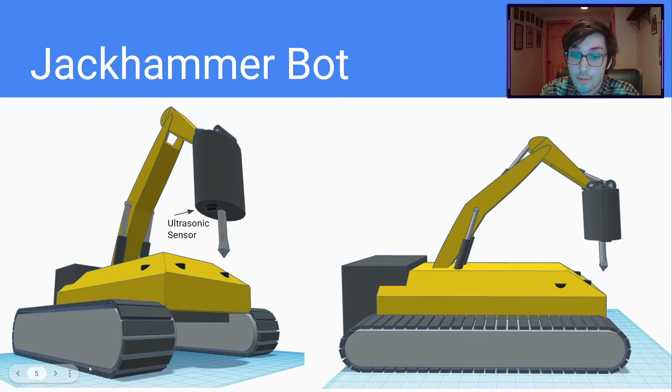Following is a description of each of the bots with the team in charge. The Jackhammer bot by Makai Gigi, Trencher bot by Douglas Tuttle, the Excavator bot by Sean Zinkgraf, and the Surveyor bot by Lucas Brown. Here are two perspectives of the Jackhammer bot with the ultrasonic sensor clearly pointed out.

On the end of the jackhammer here, as well as a top-down view of the jackhammer bot with a width of 30 inches and a length of 40 inches. Here's another perspective of the jackhammer bot. You can clearly see it's 42 inches tall when the arm is at its apex.

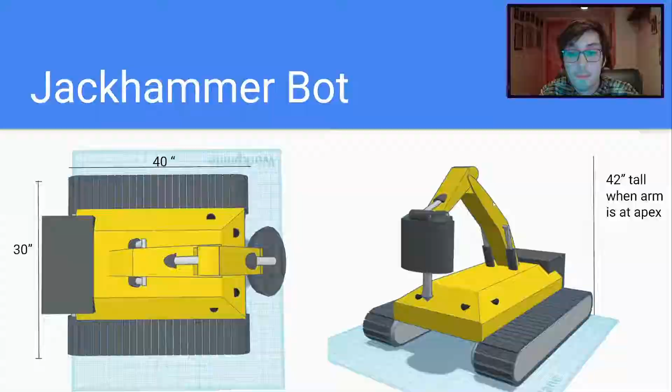Here's my circuitry for the jackhammer bot. We have an Arduino with some inputs going into a motor bridge here, as well as 4 DC motors down here, controlling my tread motors left and my tread motors right.

We have some more inputs going into some potentiometers here, which then control the arm movement of the jackhammer, the left and the right movement, the up and the down movement of the arm, as well as the aiming of the jackhammer. My final two inputs, let me go ahead and move my webcam,

are an ultrasonic distance meter up here and the vibrational motor for the jackhammer here.

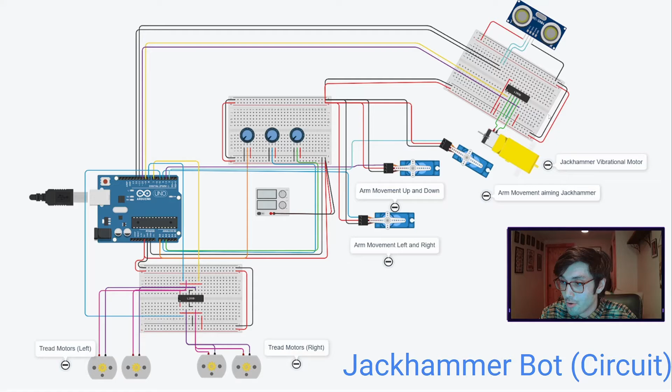Here's my flowchart for the jackhammer. We'll go ahead and start and turn on the GPS module, set up into the neutral position, and ask if the GPS module is on.

We'll get the coordinates from the reconnaissance drone and then ask is the bot at the correct GPS coordinate. If not, then it will go through these steps up here in order to move to the appropriate location. If it is there at the rock, then we'll go ahead and engage the arm servos.

Ask the ultrasonic distance sensor, is the distance less than 8, and engage the jackhammer. We'll then ask the recon drone, is the rock still detected?

If so, we'll go ahead and do all of those steps again by coming back to is the bot at the GPS coordinate, and if not, then we'll ask is there another rock coordinate. If so, we'll go ahead and do all that again, and if not, then we'll go ahead and finish.

Here's my code for the jackhammer bot. I've declared all of my variables up here and gone ahead and appropriately set them to the correct pins here, as well as a serial output for the distance read.

Here are my movement methods, all dependent upon current location and GPS location. So we have movement methods for forward, left, right, and back up, as well as arm control. We have movements for that, and then asking if the distance to the rock is less than 8, we'll turn the jackhammer on, else it will reset into the neutral position.

The jackhammer is on, we'll go ahead and ask if the distance is still less than 8, then we'll run the motor. If not, we'll turn the motor off. And else, if none of those conditionals are met, then we'll go ahead and keep the jackhammer off.

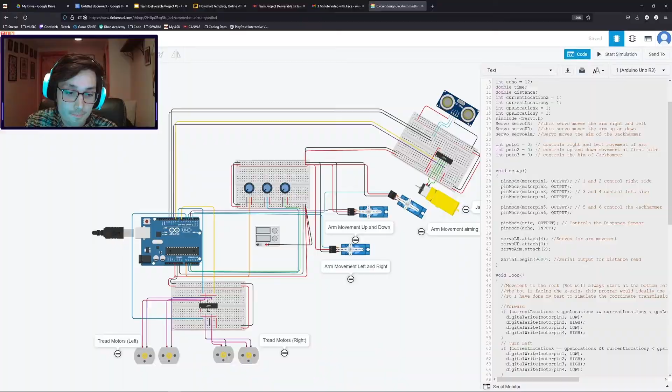The trenching bot is designed to make trenches in construction zones. Trenches are usually needed for conduit and/or piping and various other things needed for the construction of a building. The bot is a pretty simple design here in CAD.

We have a black box representing the very large battery to power the very powerful chain blade. The battery also acts as a bit of a counterweight to the chain blade because it extends so far out in front. You have 4 sets of treads. The treads were decided upon over wheels for better traction in rough terrain.

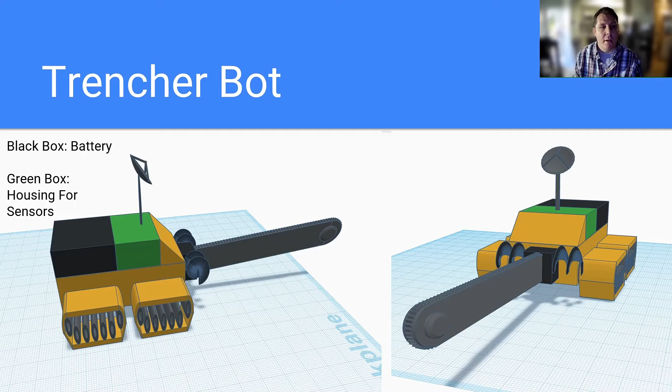Inside the green box, we have a housing for all the various sensors and more sensitive material inside the bot. In front of the green box, we have a simple debris shield. This is to better protect the battery and other sensitive components from debris flying once the trencher starts moving.

On either side of the chain blade, you'll see 2 corkscrew-like objects. These will run when the trencher is running. This is meant to direct debris, dirt, and all of that away from the bot so it can continue to move about its course. On top of the green box, we have a dish sensor.

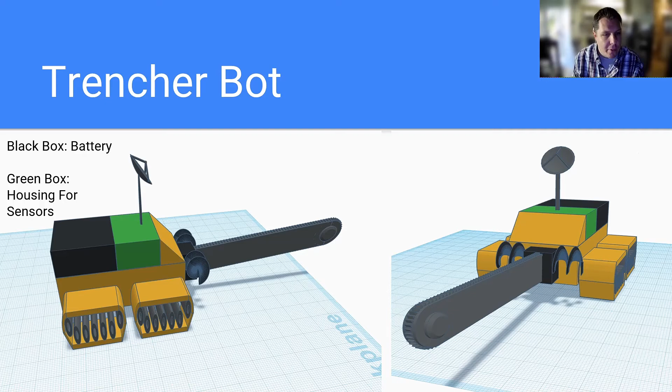This is to get above and higher than the bot to better transmit and receive data from the mothership/recon drone that we have in our system. The next slide is going to be showing you my circuits to raise and lower the chain blade so that it can trench.

It has an ultrasonic distance sensor to stop the motors should anything come within 500 centimeters of the chain blade. It also has a battery here that is meant to represent the overall battery pack for the bot. Here with the simulation, we can see once it starts that the motors are running.

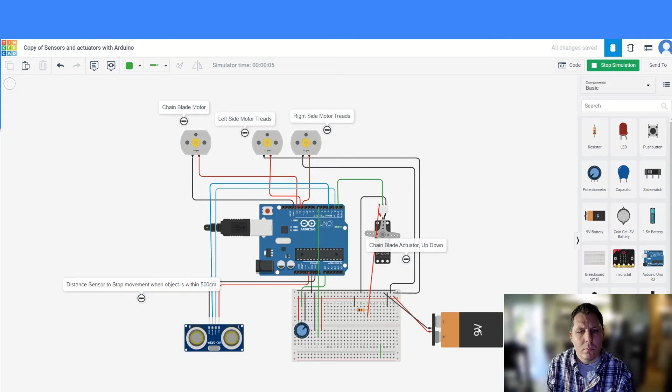We have the actuator here to adjust the height to raise and lower the chain blade arm, lower it so that it can trench, and raise it so that it doesn't trench. Here we have the external battery and the ultrasonic distance sensor that will both prevent and allow the function of the motors and the chain blade should something get within 500 centimeters.

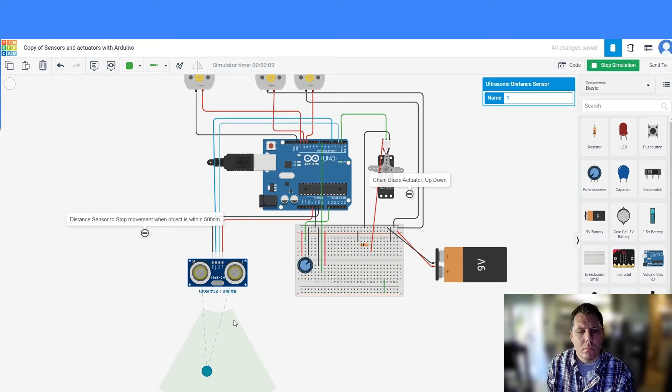Again, here we have the external battery and the ultrasonic distance sensor that will both prevent and allow the function of the motors and the chain blade should something get within 500 centimeters.

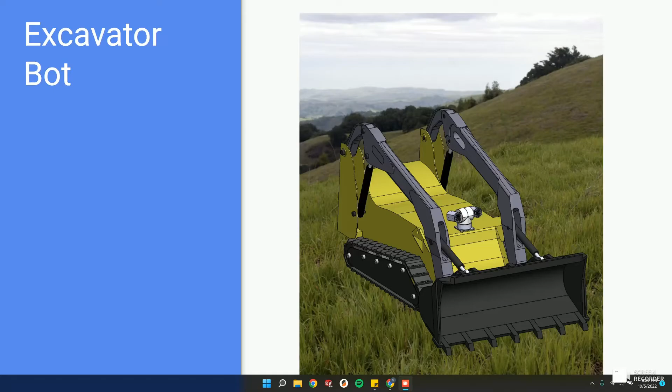My name is Sean Zincraft, and for Unearth Excavation, I designed the excavator bot. For mechanical, it is a track-driven excavator, a traditional skid loader excavator style bot.

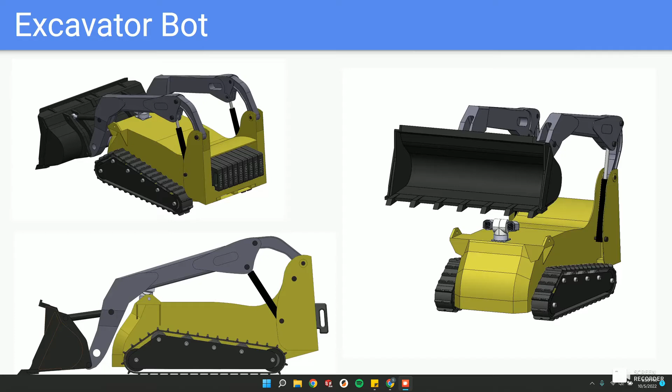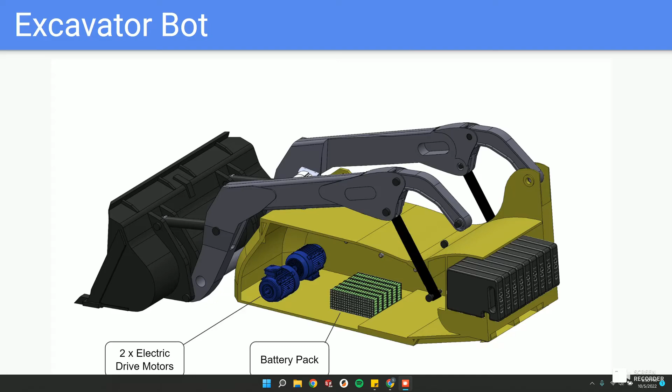It has 2 points of articulation, both driven by hydraulics, and a camera package with cameras and sensors and whatever other electronics are needed, forward facing on the front of the car. On the inside, there is a large battery pack, 2 electric motors, as well as a slot for counterweights. They can hold up to 900 pounds.

Overall dimensions for the excavator bot, as well as the internal circuitry, feature an Arduino microcontroller, 2 servos to represent the boom arm and the bucket angle adjustment. It has 2 drive motors represented by these DC motors connected to an L293D motor controller. This 9-volt battery pack represents the onboard battery pack that powers the motors.

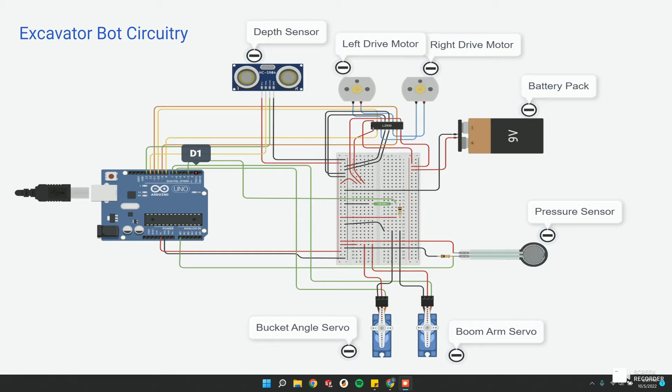For the code, the simulation starts by assigning arbitrary values that represent what the survey bot would instruct as the target location to excavate. It begins a sequence of forward, left, and right motions to navigate to that destination. It lowers the bucket, and the motors move forward until the pressure sensor reaches maximum capacity, set to 100.

At which point it turns on the motors again and navigates to the target dump location. Once the bucket is lowered, the dump is complete, and it either loops back to continue excavating, or if the job is complete, it addresses the survey component and uses the depth sensor to output readings of the depth of the excavation.

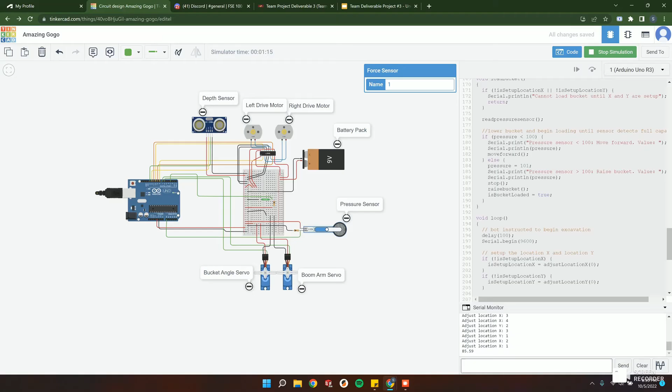Hello, I am Lukas Brown, and this is the reconnaissance drone of the Unearth excavation project.

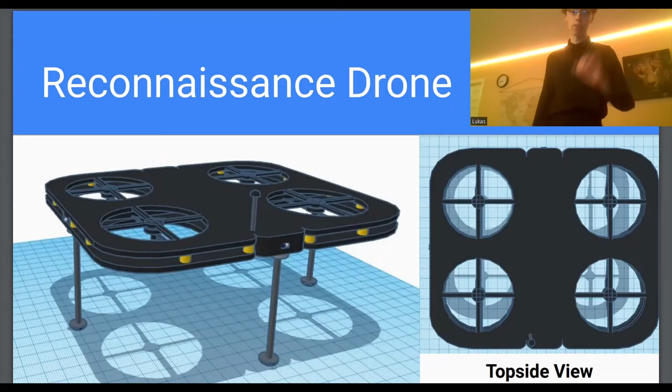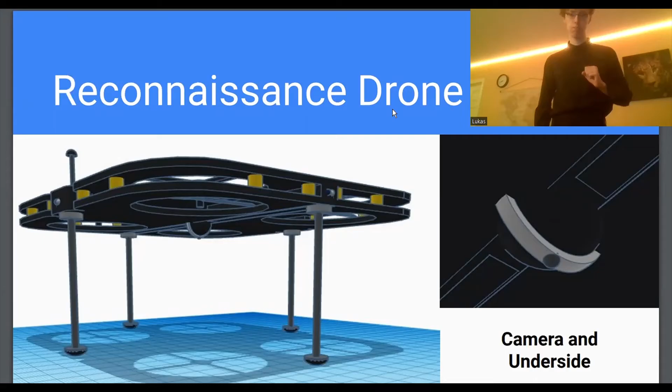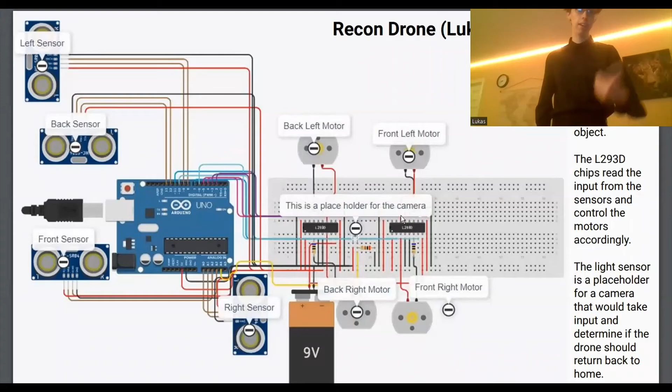Now here we have the circuitry, with 4 sensors, an Arduino, 4 motors, 2 L293D chips, and a power source. The motors control the propellers, with the L293D chips controlling these motors. Then you have the sensors, which provide input to the Arduino, which relays that to the L293D chips. Alongside that, the Arduino is what controls the drone as a whole.

The camera will relay this information and feed it to the Arduino. If the camera determines there's nothing more to record, it heads back to home base. And that is the reconnaissance drone of the Unearth excavation project.